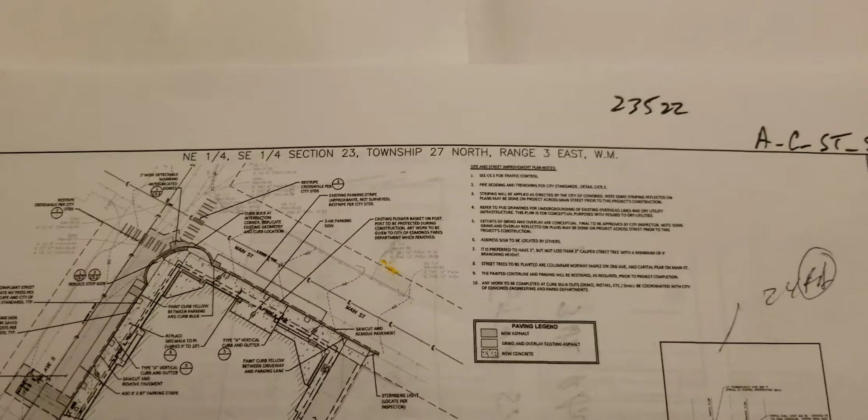This is for job 23522, Graphite Art Studio. This is a bid for Deacon. It's going to be asphalt, concrete, striping, and sign. So there's a separate set of plans. They actually have two buildings side by side they're going to be doing. The art studio is here, and then there's a graphite residential building here.

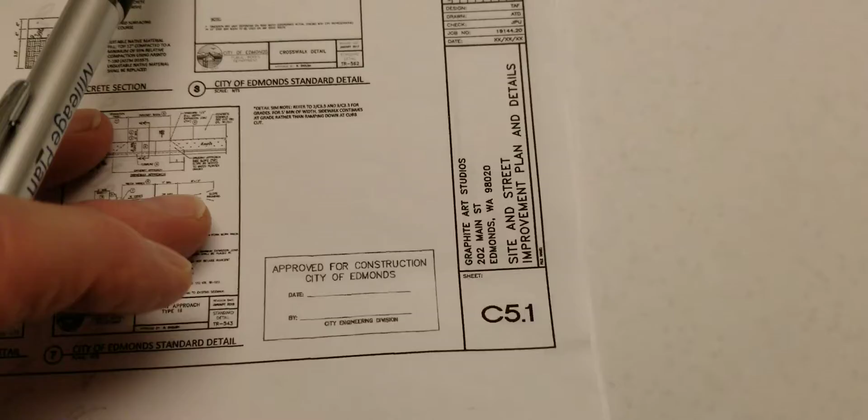Now this is the plan. There's two sheets that I put into Doc Manager. It's sheet 9 and 10, but the way they are labeled, it's C5.1 and C5.2. All the info that we need to put this bid together are on these two sheets.

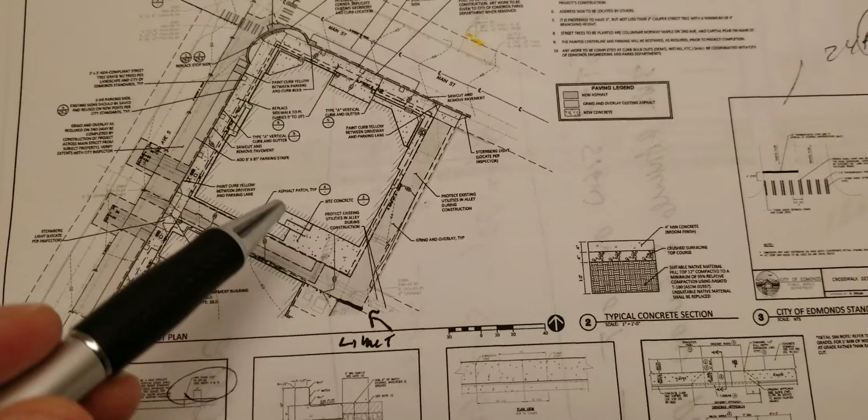So I want to note that they don't have a break line, but this seems to make sense reading through all the documents. I want to have a limit right here for this building, but this work, I want to go down to the property line because they have to repair this street. At least it appears that way. Now, the light shading is spelled out here, and the dark shading is spelled out here. So this is patching, the dark, and the light is grind and overlay. Figure 2 inches on the grind and overlay.

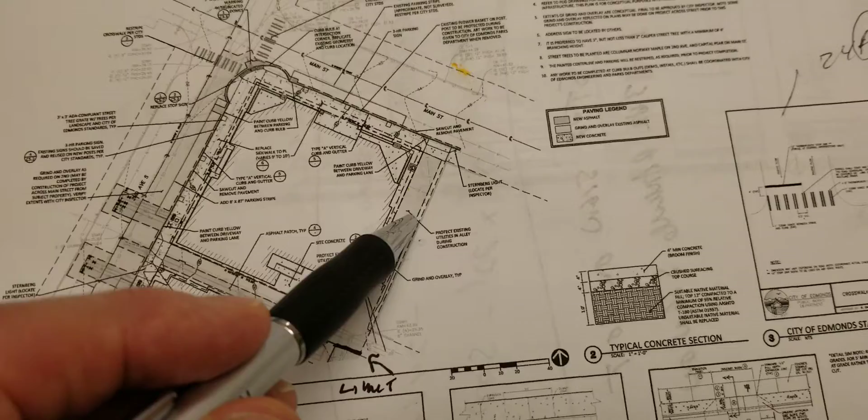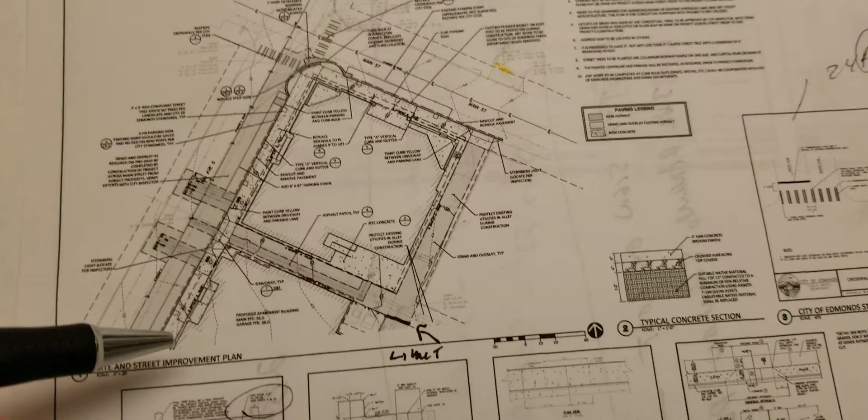Walking on Google Earth, this is a little alligator, but that's what it's requesting right now. This looks pretty good. I'll put some notes together when I send the bid to Deacon about grind and overlay here, or I may even put a comment in the bid itself. Okay, so I would like to bid the asphalt work, and in this case, you can talk to Joe about it. I would like to consider doing remove and replace on the concrete.

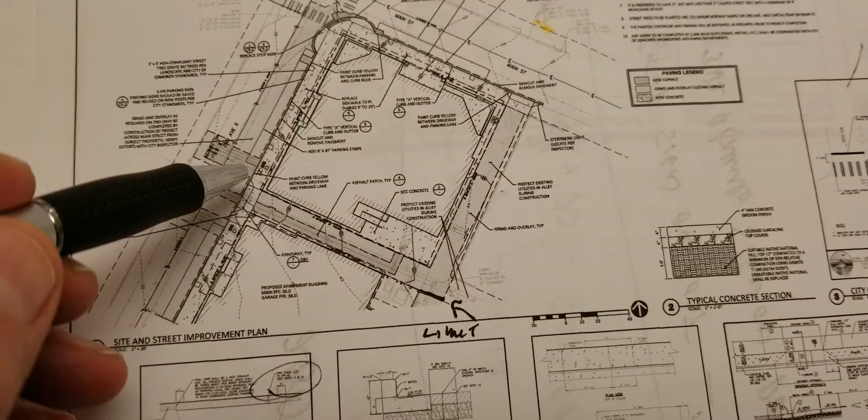If you walk on Google Earth, this is all existing sidewalk and a driveway at each alley, and this is all city sidewalk. Now this is curb and gutter, this is city sidewalk, and then there's a dark shaded area for patching 2 feet out all the way along the extruded or the curb and gutter. So we can bid it just placement only and say that somebody else is going to take it all out, but it would seem fairly simple to take it out and put it back in.

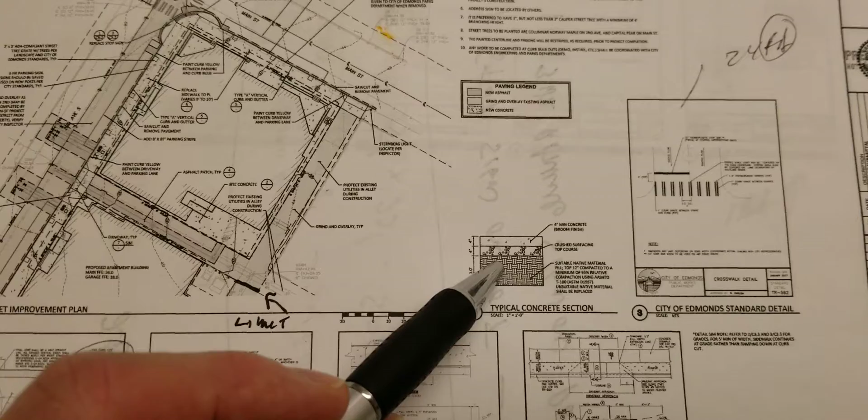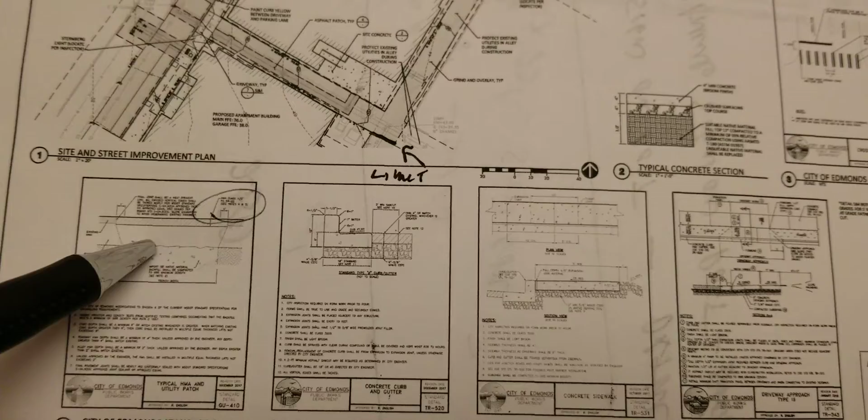All specs are on this sheet. So you got your depths, concrete's 4 inches, you got your driveway approaches, you've got your city sidewalk, like right there needs to be an expansion joint between the curb edge and the edge of the city sidewalk. Also it spells out the depth, which is no different than the other. You got the curb and gutter, and you got the asphalt, and the asphalt is PG 64-22, so it's Washington spec.

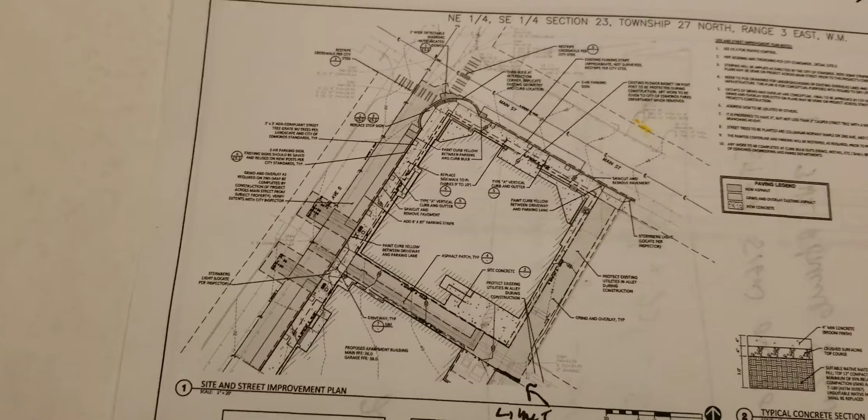Please note you got some truncated domes. There's a little bit of striping. There is a traffic control plan that's included in this set of plans, so we will have to implement it, but we won't have to create it. This street is 2 lanes with parking on both sides, and this street is 2 lanes with parking on this side only. The only thing I'm not sure of is whether we should bid in a street use permit. I guess right now we'll make it simple, and I'll put in a comment that we're excluding all permits.

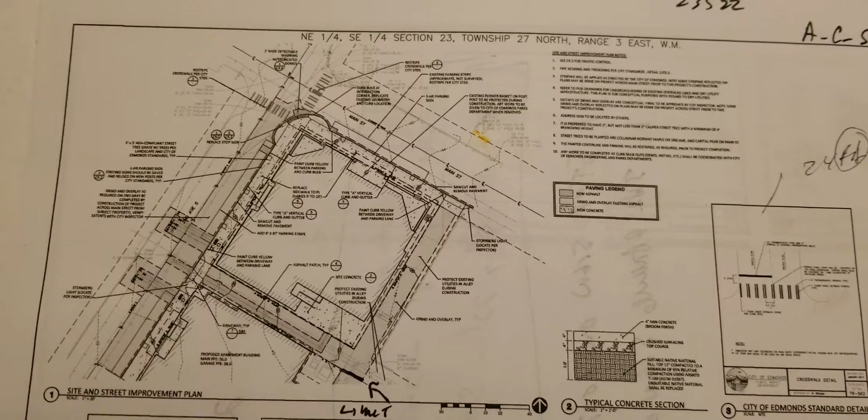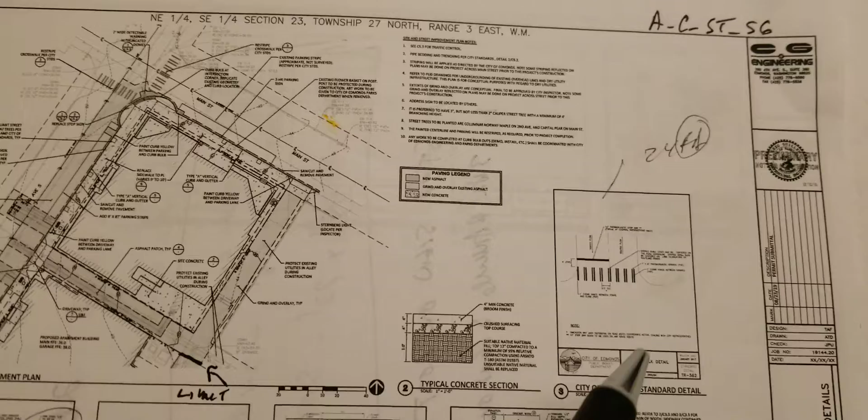Okay, so I do not really want to bid this concrete, and there's a little bit of concrete there. And I've already put a comment in that we're excluding that. We're just doing the city sidewalk and the city curb and gutter. There is a note about thermoplastic crosswalk bars there and there. However, in the notes, it says that you have to work with the city inspector to decide which ones are being done. So we can't really bid that, so I'm going to exclude those, because we don't know how many there will be.

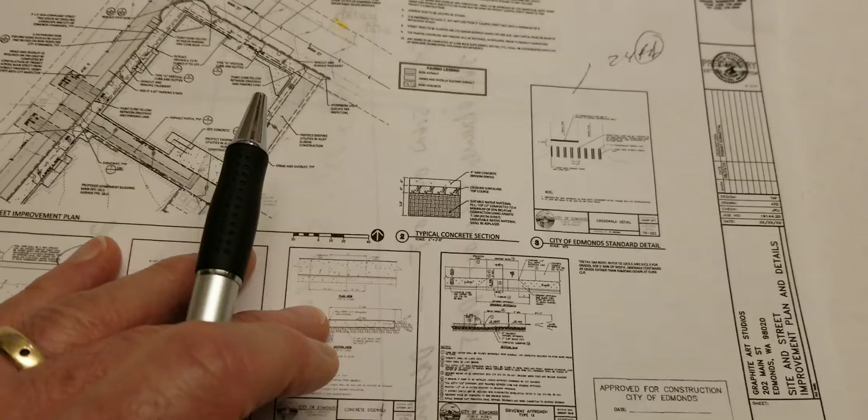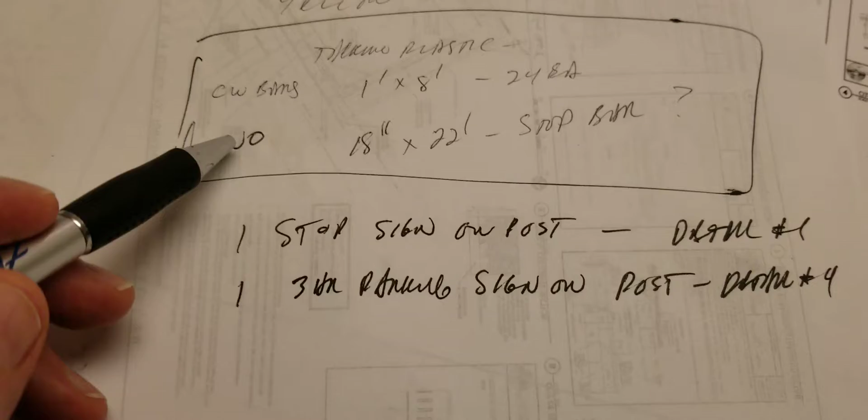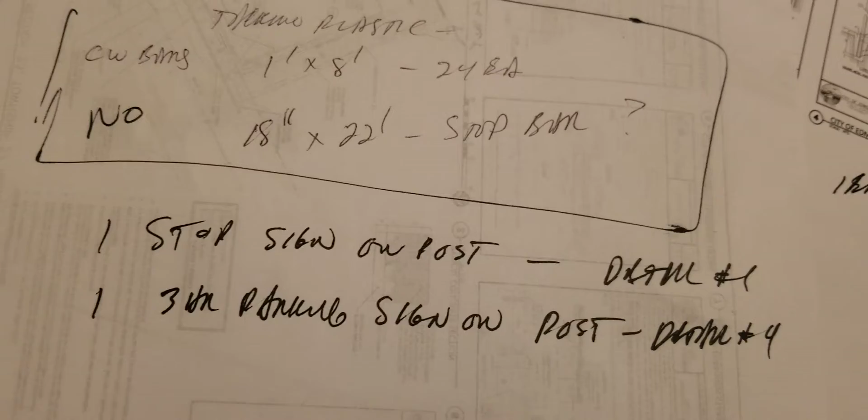And the striping, cross-hatching white, 280 feet, yellow curb, 50 feet. We'll skip the thermoplastic. Stop sign on a post. It's Telespar post with a base set in concrete. It's detail number 1, and then there's one each 3-hour parking signs. Telespar post, and those details are on that second sheet.

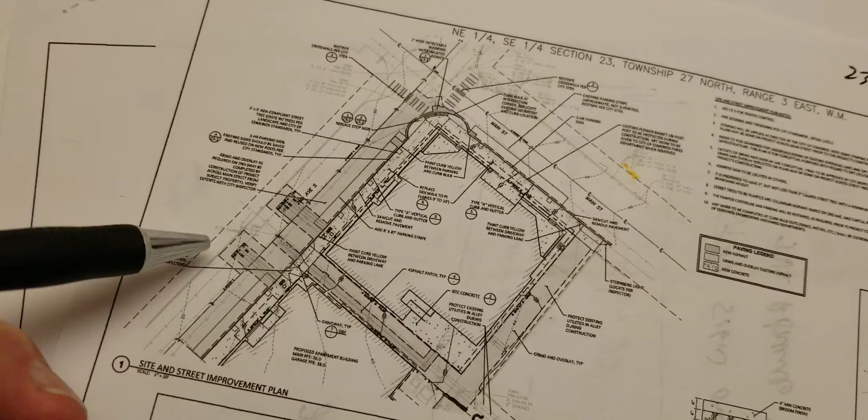So detail 1 is for the stop sign. Detail 4 is for the 3-hour parking. And those signs are outlined with those notes and with that note. And they're just placed near the building. That's about all I can think of. Pretty simple. And then I'll do a separate video and show you the plans.